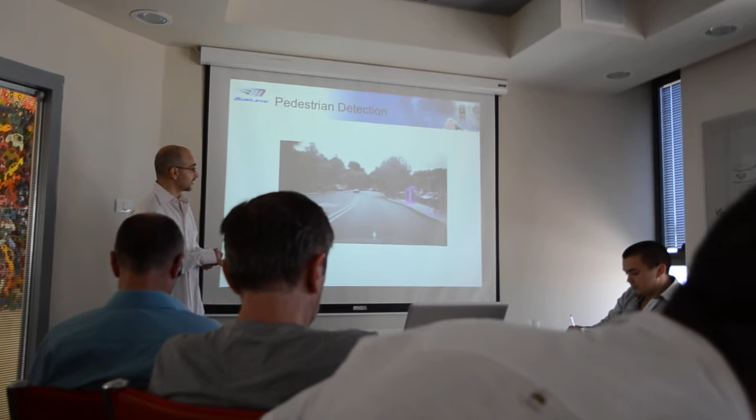Honestly, the one thing I'm mostly proud of is what others have said about our technology. Lately there was a big conference at MIT where they talked about how far artificial intelligence had gone, and one of the leading AI researchers said in some aspects we're not that happy with the situation, because although there is Deep Blue, which is probably the first computer software which beat the world chess champion, and there's Watson, which did the same for Jeopardy, there's Mobileye, which did the same for computer vision, in the sense that it's proven that what was considered to be done by a human can be done by machine vision.

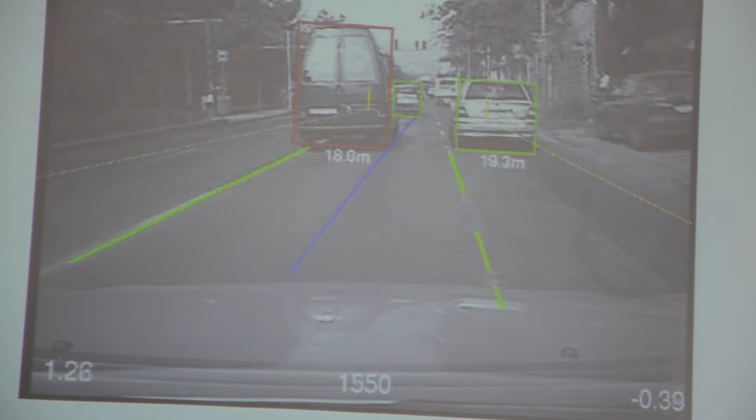Pedestrian detection is one aspect, vehicle detection is a second aspect. Again, we're overlaying the system output on the image - of course that's not what a driver will see. Eventually this information is used for either warning the driver, controlling the vehicle, or doing other things. But the heart is the ability to find the object, know which of them is relevant - that's the one we mark in red here - assess the distance, the relative velocity, the time to collision with that object, analyze where the lane marks are, and use all of that information to help the driver.

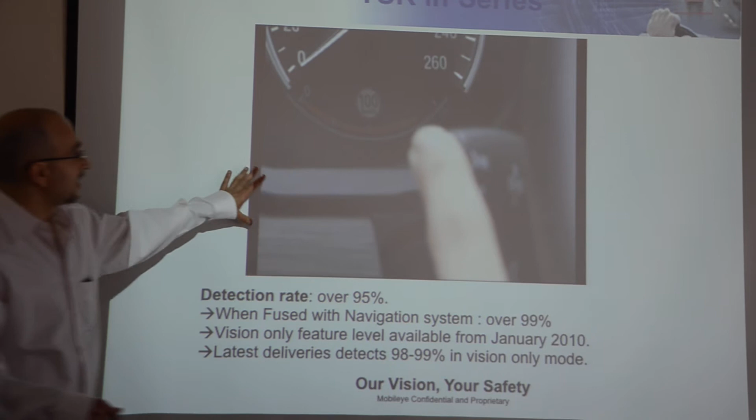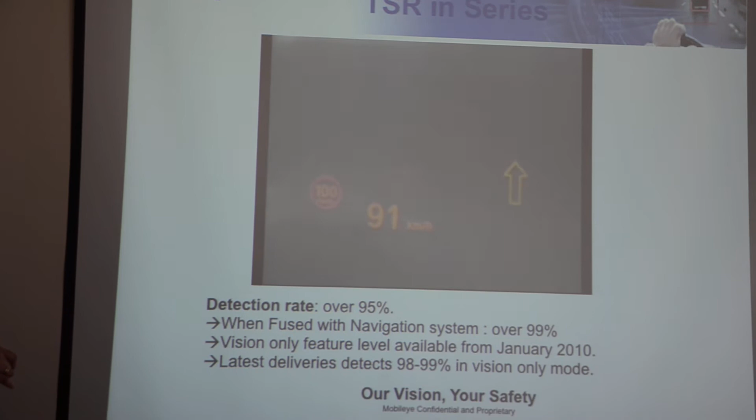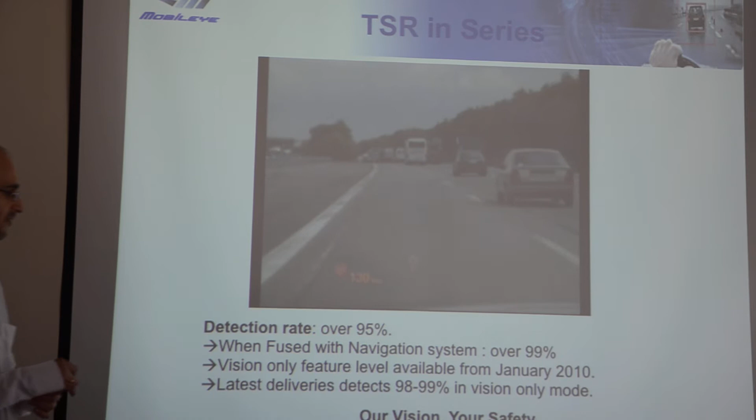I'll skip that slide. One example of another technology we have is traffic sign recognition. This video was made by BMW when they launched it in 2008 - the first product doing traffic sign recognition along with other things in parallel, done based on our camera technology jointly with navigation information for places where you don't have signs but still need to drive at a certain velocity. It works very well, and gives drivers the information of the allowed speed limit.

This technology works at very high reliability, 98-99% in most countries. In Germany it's even above 99%, very high precision. We've extended it from just speed limit signs to other important signs, and we're in an ongoing process of adding more and more functionality there.

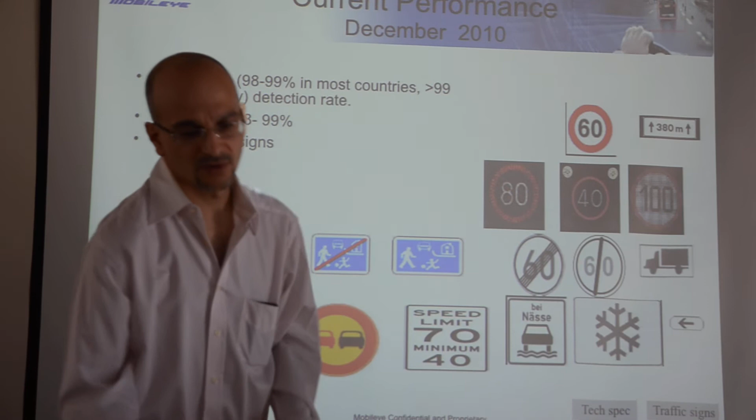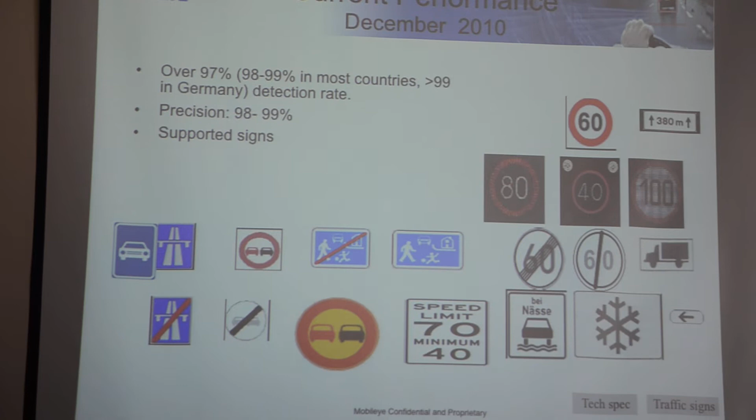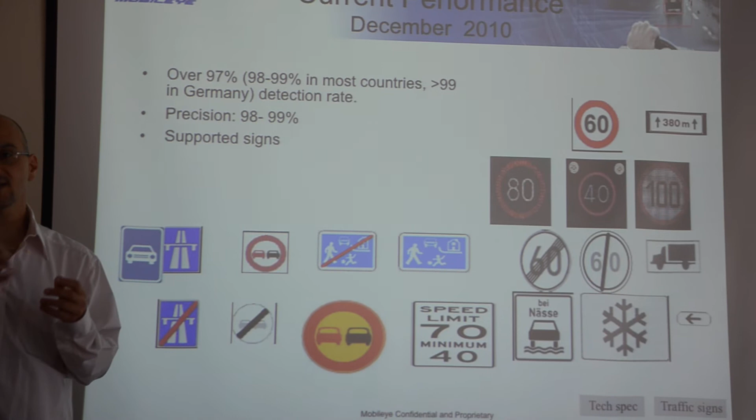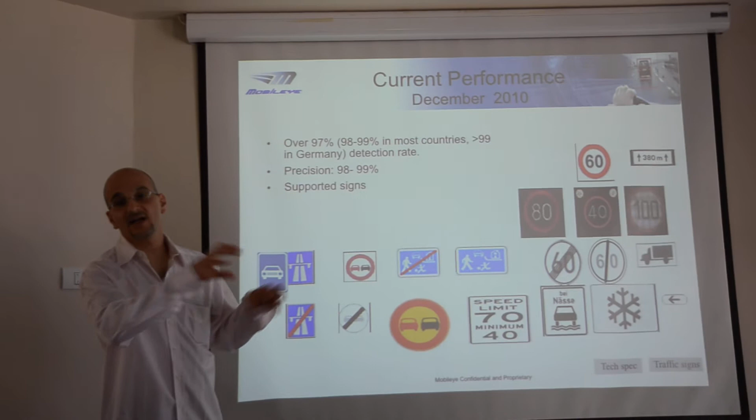Question: What's the difference between Germany, France, or other countries related to the percentage of success? Answer: Multiple reasons. One is that in some places in Europe you have very small signs or problematic electronic signs, which we cope with well, but it's more challenging. The second reason is the system not only detects the signs, but also detects the small signs one often has below the sign, and those change between countries. With traffic sign recognition, some of the complexity is the fact that you need to collect data to train your system from various places to cope with all challenges.

Question: What's the resolution of the sensor needed to read such instructions? Answer: We usually need to see something like 10 pixels from a sign in the image, and the imager we currently use is, in many aspects, quite close to almost a blind person - it has just VGA resolution. The product will have, in 2014, four times this resolution, 1.3 megapixels. Just to give a ballpark understanding, we manage to detect a vehicle at 100 meters with VGA resolution, because you can compensate for the low resolution of the imagers by using very sophisticated algorithms.

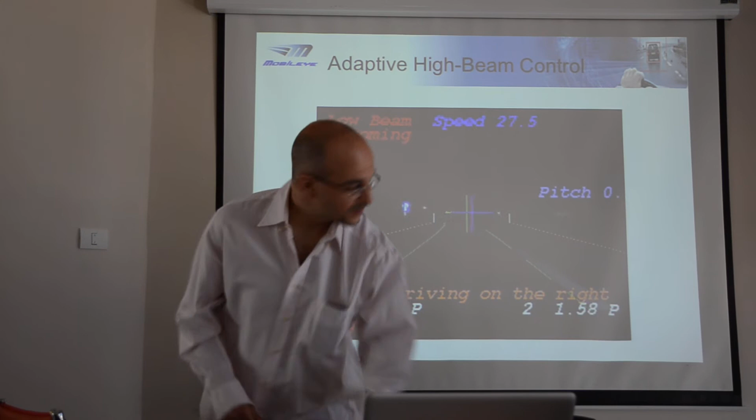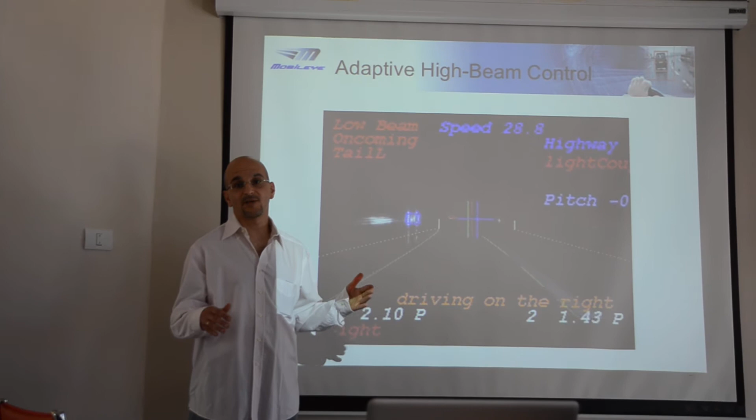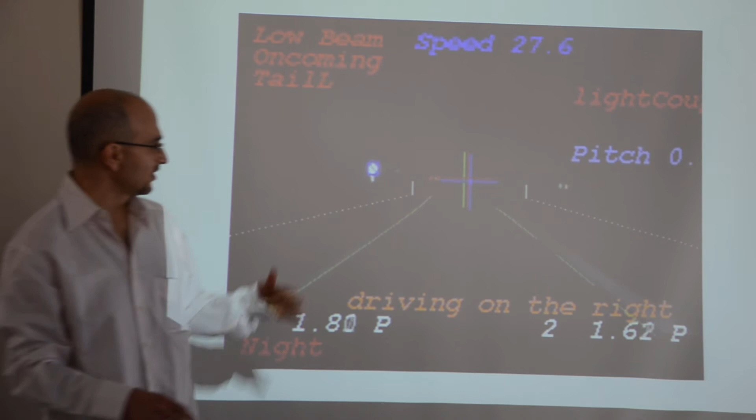Two additional examples. This one shows the challenges in automatic high beam control. Eventually what one wants is, when you drive in a dark area, to be at high beam all the time, and when there's a vehicle coming or other situations, to lower your lights. I'll play it again - it will automatically switch to low beam. What we have here is we're marking that we have seen the headlamps of a vehicle, and based on that we'll switch to low beam.

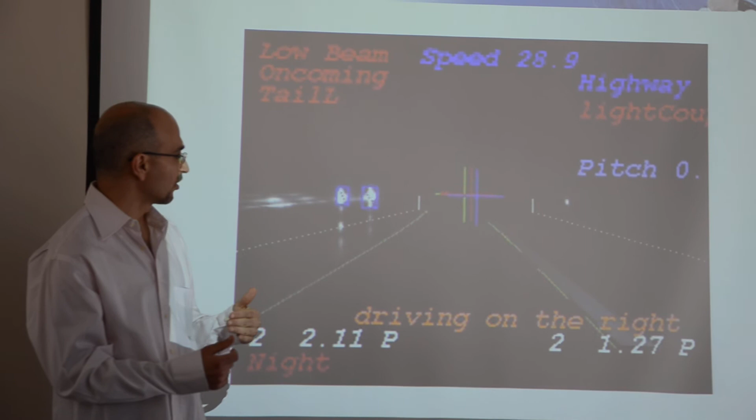The basic application just does the binary thing, but the more advanced versions coming to market this year, next year, and the following years use the fact that headlamps are becoming more complicated - at various areas you'll be at high beam, at others at low beam, maximizing the portion of time you're driving with high beam on.

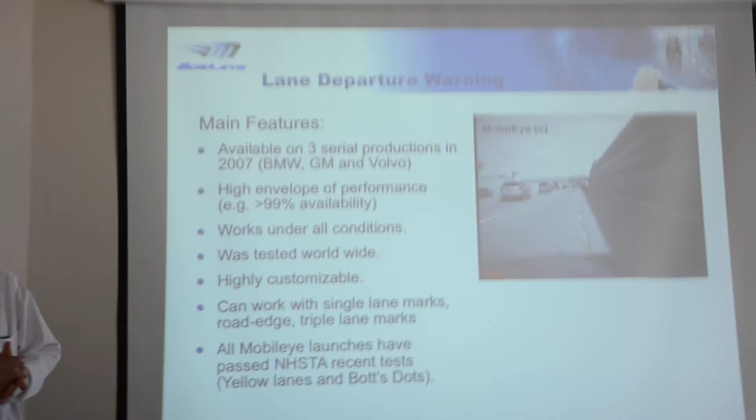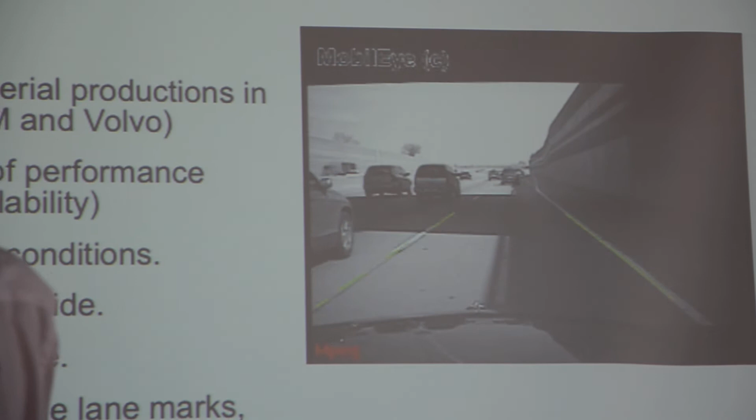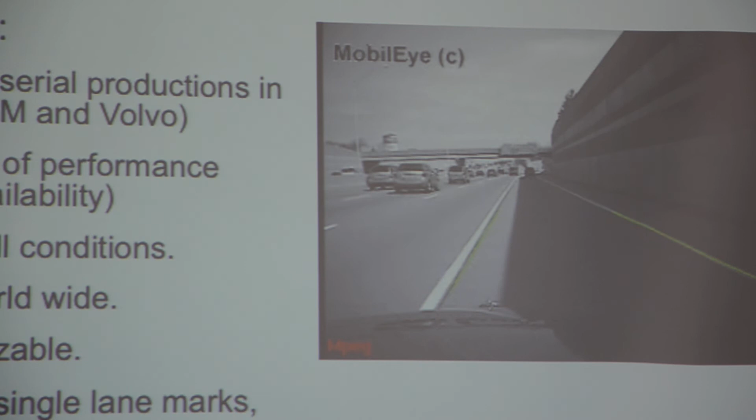The next technology is lane analysis, and you can see the type of challenges - there are many other lines due to shadows and other things which are not lane marks, and one needs to find the correct lane marks in the scene. I'll play it again - I think that was taken in Jerusalem. You may have driven through this road, it's the Begin Road, and it tends to have those shadows.

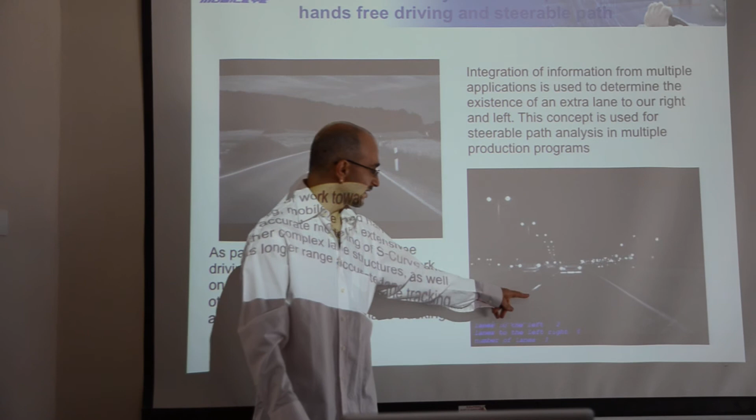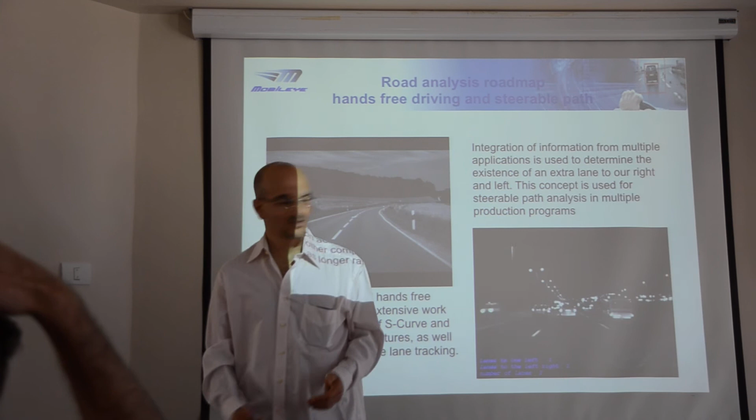We had that in production already for 4 years, since 2007, with multiple car manufacturers. There are many other nice technologies related to lane analysis - for example, one can know how many lanes there are. You can say there are 1 or 2 more lanes to the left, 0 to the right, and merging that with navigation - if you need to turn right in 500 meters and you're already on the right lane, it will wait and tell you only 200 meters beforehand. But if you're in the leftmost lane, the system will know to tell you in advance to improve your driving style.

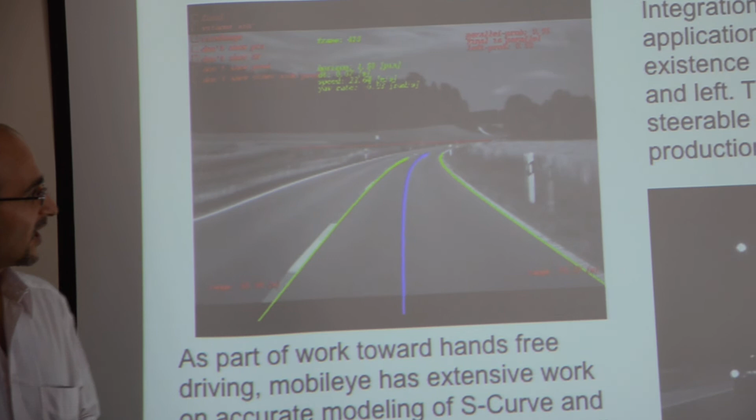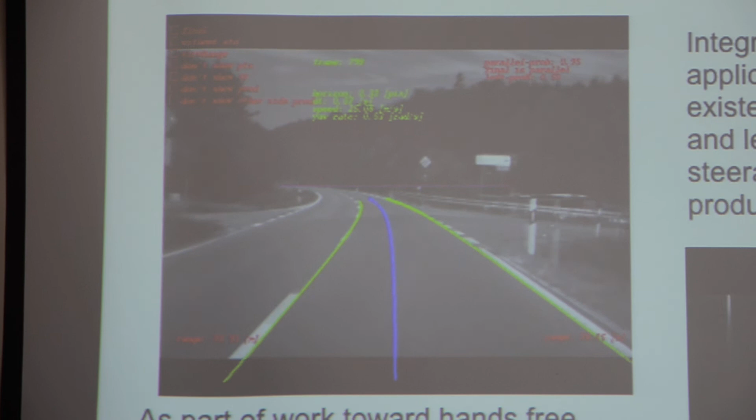The technology also has to cope with challenging roads with many curves and other complications. In those roads, it's really nice if the car can help you stay in the center of the lane with so many things disturbing you from doing what you ought to do and just driving. So the system has to cope with the challenges of far-from-trivial road structures as part of the technology.

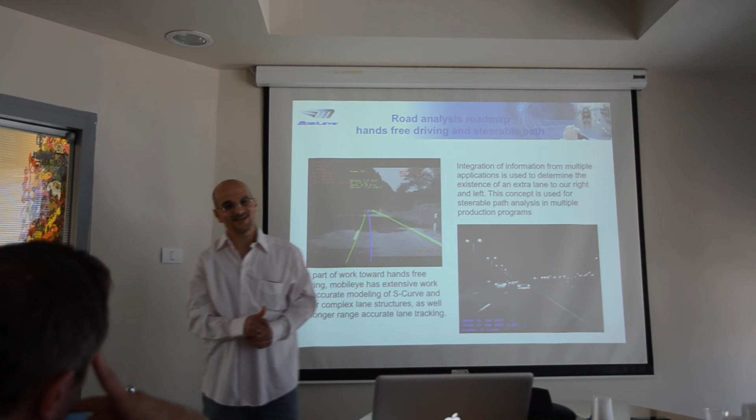I think I already stole a lot of time, so I'll stop here. There are many other interesting technologies we're doing, and if you have any questions, I'll be happy to answer.